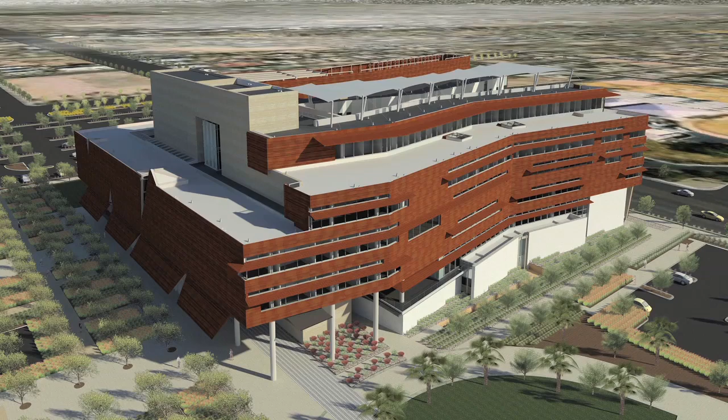This presentation documents the design, construction, and occupancy of the Health Sciences Education Building. We will utilize a case study format to better understand this exciting and complex project.

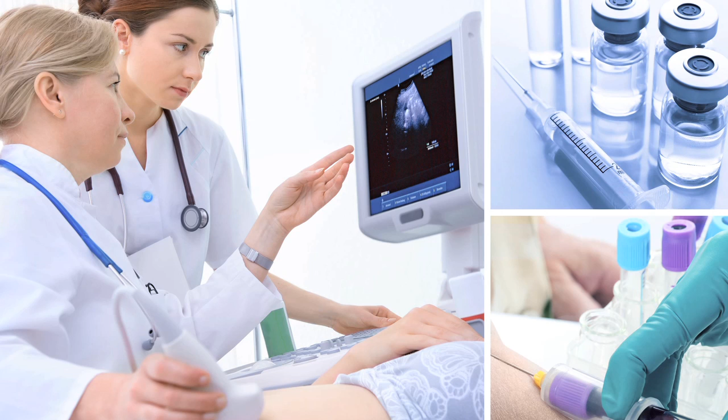The University of Arizona College of Medicine Phoenix has partnered with Northern Arizona University to create an innovative model for an interdisciplinary approach to health sciences education and research. The two universities, each with distinct institutional cultures, will collaborate on one campus, the Phoenix Biomedical Campus in downtown Phoenix at Copper Square. The city-owned Biomedical Campus is a 28-acre urban medical and bioscience campus planned for more than 6 million square feet of biomedical-related research, academic, and clinical facilities. The campus aims to have the highest concentration of research scientists and complementary research professionals in the region.

Phoenix is the capital of Arizona and the state's largest city, with 1.4 million people and a total metropolitan population of just over 4.3 million. With a huge land area of 517 square miles, the city has a low density rate of about 2,797 people per square mile. As a point of comparison, Philadelphia has a similar population at 1.5 million, but a density rate of over 11,000 people per square mile.

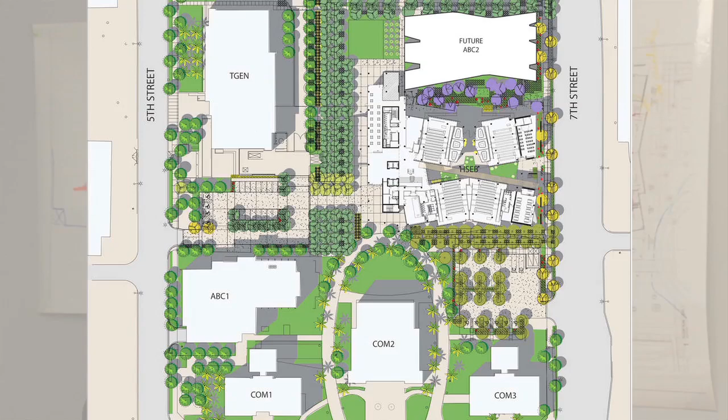The City of Phoenix owns the land of the Phoenix Biomedical Campus. We have been assembling property over a number of years, created a genomics research facility, built TGen's genomics research institute, which brought the interest of the U of A to Phoenix and to site the medical school, along with some historic buildings that are part of this campus. This is the next extension of the development of the Phoenix Biomedical Campus and the extension of the medical school.

Historically, campuses really are great transitions between what we call the town-gown relationship. It really helped to pull that together here. The scale is lower, a nice transition between those two. The idea of having an element in that location where there's always going to be activity going on is another great thing.

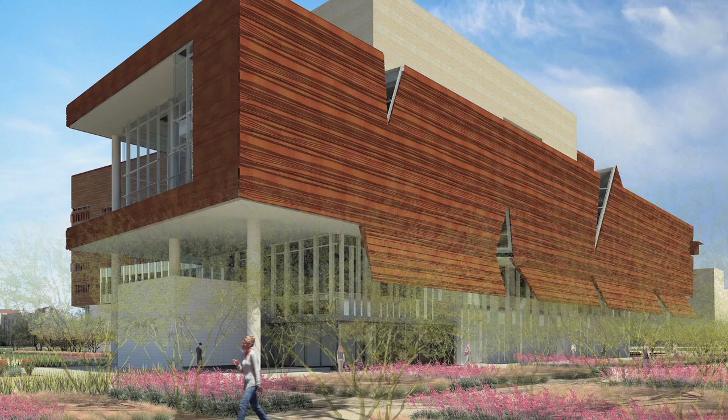So it really starts to blend those two things together. By having a campus, you can really control the flow within the campus and through the campus, so we're able to maintain the grid of the city through there without really disrupting that. And so what it does is it creates the element of surprise. You know, suddenly you're on a campus and you weren't really expecting that, but hey, this is kind of cool, and then you move through and you're downtown.

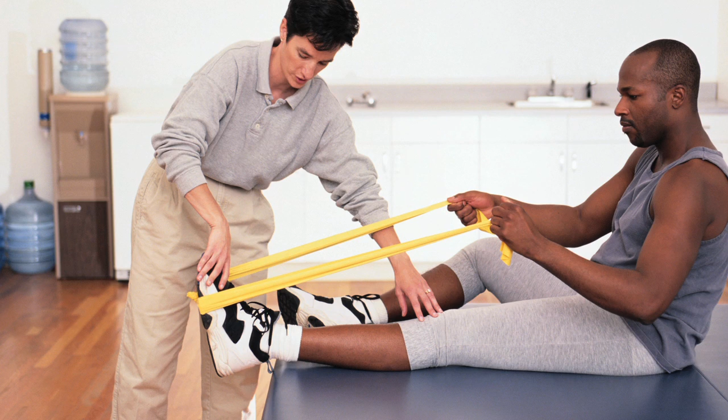The new copper-clad Health Sciences Education Building, or HSEB, will support the colleges of medicine, pharmacy, nursing, public health, and biomedical informatics for the University of Arizona. Northern Arizona University will offer its new physician's assistant and occupational therapy programs, as well as an expansion of its existing doctoral program in physical therapy at the new building.

When completed, the 268,000 square foot, six-story facility will provide learning environments to train 1,200 medical professionals. One of the major goals of this building was to build and construct a building that could be used in what we refer to as interprofessional training, that is, all the different health disciplines being able to interact while they're being educated within one space.

So in this new building, we're going to be seeing medical students, but you're also going to be seeing physician assistant students, physical therapy students, eventually pharmacy students, public health students, maybe nursing students, that will all interact in the educational setting, which really will prepare them for the real world.

Right now, most of those health professions are taught separately. We know that everyone works together when you get out into the real world. The doctor is alongside a nurse, which has to prescribe something that a pharmacist is going to fill. But those disciplines are not taught together. This building allows for interprofessional training right from the beginning so they know how to work with each other when they get out. This is a great place for them to start.

They're going to spend their first day in the profession in this building. Their first day of school, their first day of lab work, their first day of study in the library is going to be in this building. Someday they're all going to take care of us. We'd like to think that we're giving them a great start in a great facility.

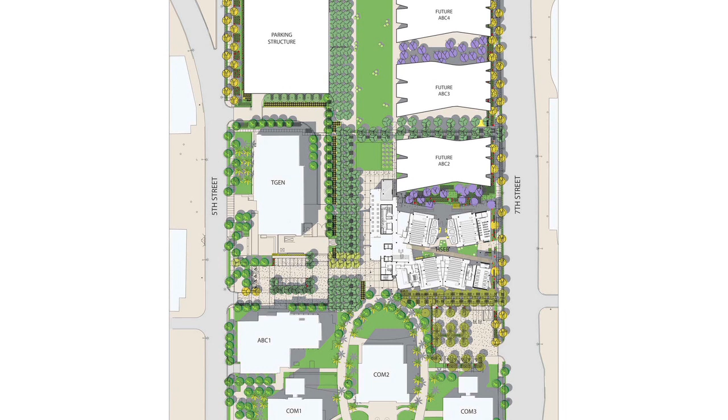The city's strategic vision for the downtown area where the HSEB is sited includes goals of density, community, and mixed-use development. The siting of the building originates from the master plan by Ayers Saint Gross, which establishes a north-south central campus green. The green connects the historic buildings, located to the south, with current and future research facilities to the north.

The site of the HSEB is on the southeast side of the campus, where a parking lot was once located. It is bordered by a busy street on the east side.

The City of Phoenix is on track with this in terms of how important density is in building up downtown. The city has introduced what's called the Downtown Code, and it's not for the entire City of Phoenix out to its limits. It's being defined for what we're calling the urban core downtown, from 7th Street over to 7th Avenue, and our campus is in the middle of it essentially. So the guidelines put forth in the Downtown Code apply to our projects.

In general, it's all about density and building to the property line and creating landscaping and doing all you can to create shade. Shade—if you haven't been here in July, you need shade when you're walking downtown. Trying to get more people outside and to use downtown year-round, and the way to do that is to create shade. You've got to get some shade on those sidewalks, whether it's from taller buildings closer to the property line to tree-lined streets. You have to do what you can to create some comfort out there.

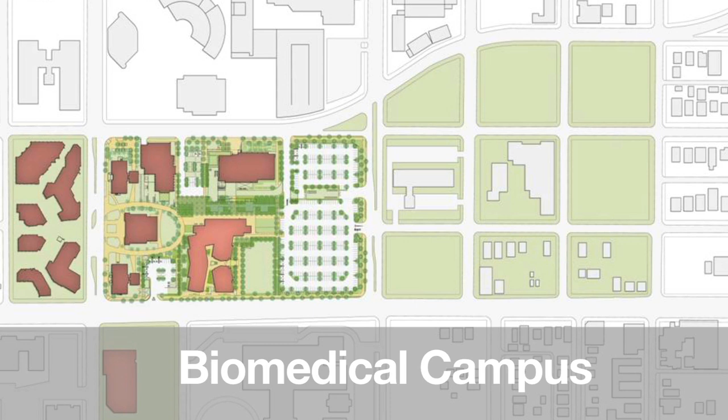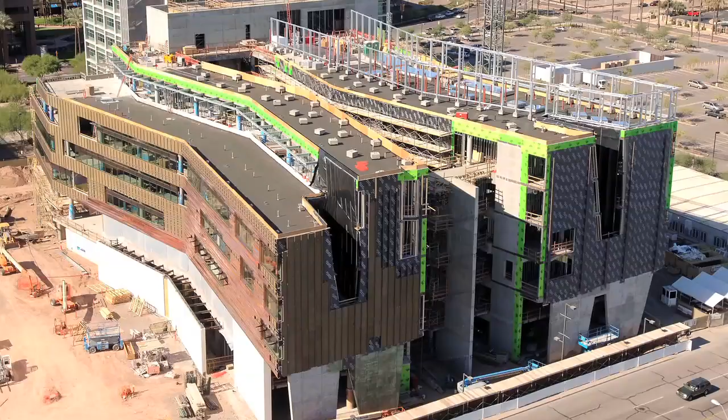We've assembled 30 acres of land to create this biomedical campus. This facility is sited in the center of that. So it was important for us that we maximize the resource of the land. The difficulty of assemblage and the price of assemblage really predicated that we needed to build up in the greatest density that we could, working through the programmatic constraints of moving students through a building.

Going into a high-rise condition is difficult—obviously higher priced construction, high-rise zoning, building code conditions, etc. So I think the project's really created a good balance with maximizing the finite resource of land availability with the density the project has achieved, and a good floor-to-area ratio, and likewise balance and symmetry to the campus. We've got the TGen facility, similar in height, stepping down to adjacency to the historic buildings as well. So I think the projects have created a good balance on the campus in those aspects.

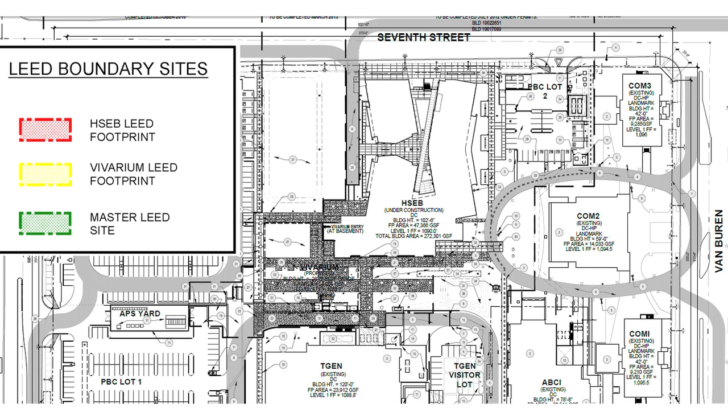The HSEB will take advantage of the campus and multiple building certification program for LEED certification. This LEED program helps project teams more easily and efficiently certify multiple projects located on one site and under the control of a single entity. The program's goals are to encourage a holistic, sustainable approach to project management, address the unique challenges and opportunities inherent in campus projects, allow project teams to document a credit once for the entire campus, and capture economies of scale in the certification process through shared credits.

The majority of the credits in the Sustainable Sites credit category will be achieved using the campus approach. In addition, water-efficient landscaping, refrigerant management, green power, environmental tobacco smoke control, and a green cleaning program are all implemented on a campus-wide approach.

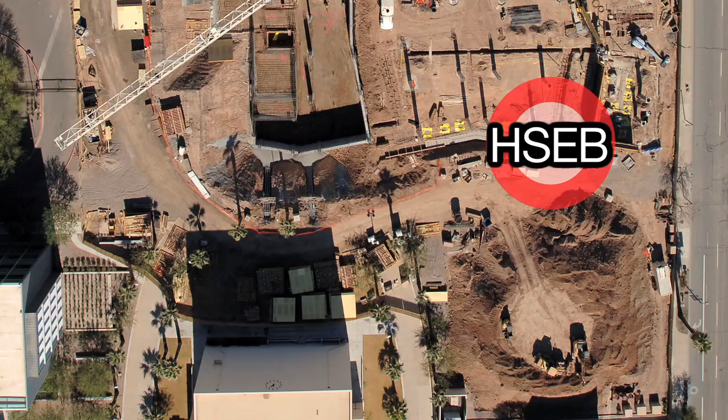The site previously was a parking lot and not making the best use of the land in downtown Phoenix. We, along with the design team, decided to use this particular portion of that parking lot for this building because it related most to existing buildings on the site. It's very important to make decisions for urban infill as opposed to a greenfield build, especially for a building that's so integrated with health sciences and education. Educating people about this site choice is very important.

Energy and atmosphere: reducing energy use in an extreme environment is a priority.

The team uses the integrated design approach and early energy modeling to optimize the performance of the building.

The desert is relentless and harsh, yet hundreds of generations have subsisted here, adapting to the ecosystem through respectful, practical, and sustainable practices.

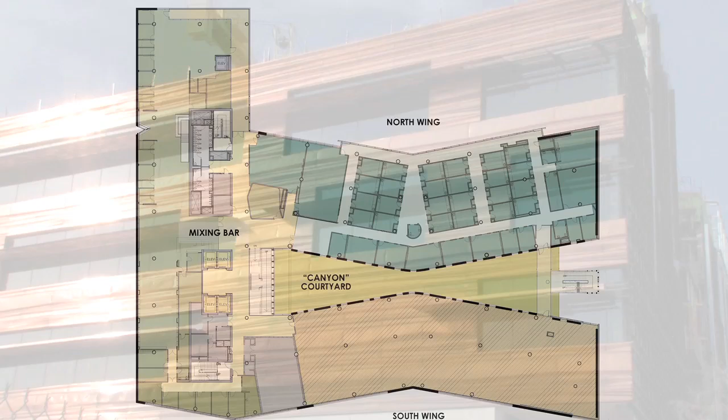The design for the Health Science Education Building was shaped by the desert climate and the goal of reduced energy consumption. The facility is organized into east-west wings connected to a north-south axis, establishing the eastern boundary of the campus.

The building's form and its orientation result from efforts to minimize the intense effects of the Arizona sun. The overriding idea behind this building was that it could only be built here and nowhere else, and it should look like that. That derives from its relationship to the place, what's important around it, but also its geographic nature.

This is fundamentally a desert landscape, and the sun is incredibly intense, so the design of the building is really formed by that. If you look at the building, it is elongated in the east-west orientation.

The idea being that you get predominantly north and south elevations, because those are the easiest to treat here. The north has just a little bit of sun coming around, and on the south the sun is fairly high, so with sunshades you can design the building fairly easily to protect that.

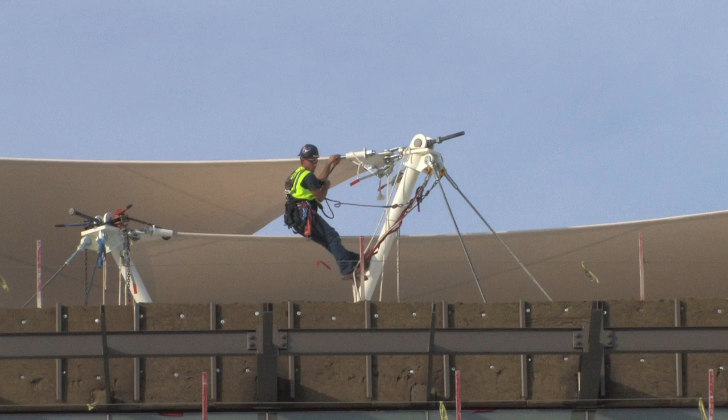But the east and west are much more problematic because the sun is really low, so we try to eliminate, for the most part, east and west windows. You'll see there are these kind of incisions into the building where we needed light.

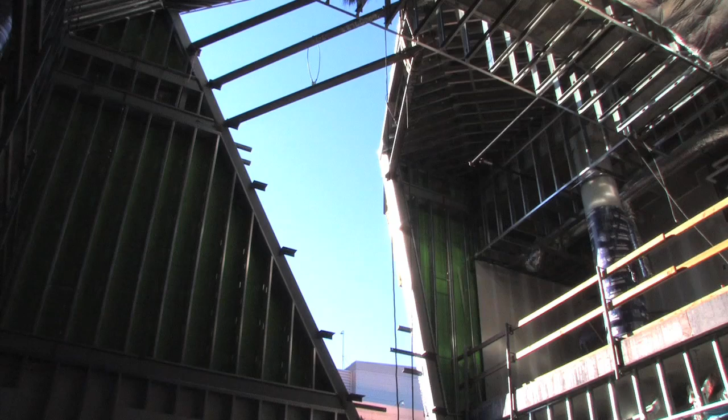You can see that in the Learning Resource Studio, the library up on the 3rd and 4th floor, where you have these big insertions so that even though we need light from the west, we get it from the north and south.

And also on the east, we have these big insertions. We have these big walls that are all copper, but we have cuts in the building that give light into the building where you need it. And then we have that big canyon.

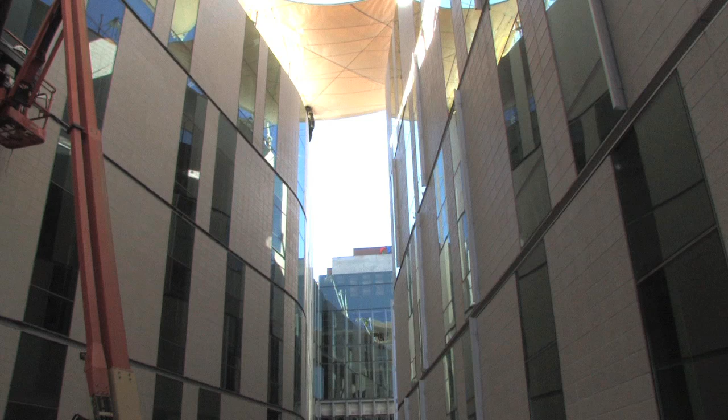The description I gave of how the building evolved affects how the building sits on the site. It's more a passive approach to doing the right thing in terms of energy consumption.

LEED has scores in terms of energy consumption, so from the outset that was one of the biggest factors for us in terms of LEED: trying to minimize the amount of energy that the building consumes.

Early in the design phase, the team turns to energy modeling in order to optimize the performance of the facade. The first step in developing an accurate and informative energy model is to establish the best climate data for the location.

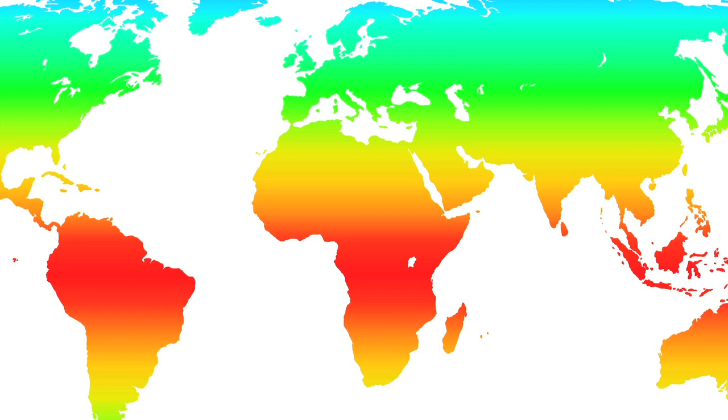The relevant data evaluated includes: 1. The monthly mean temperatures, which peak at a high of 115 degrees Fahrenheit. 2. The annual hourly temperature and humidity. Phoenix is typically a hot, dry climate, but there is an official monsoon season in which humidity reaches 60% RH with an outdoor temperature of 100 degrees Fahrenheit. This condition proved to be the worst-case design condition.

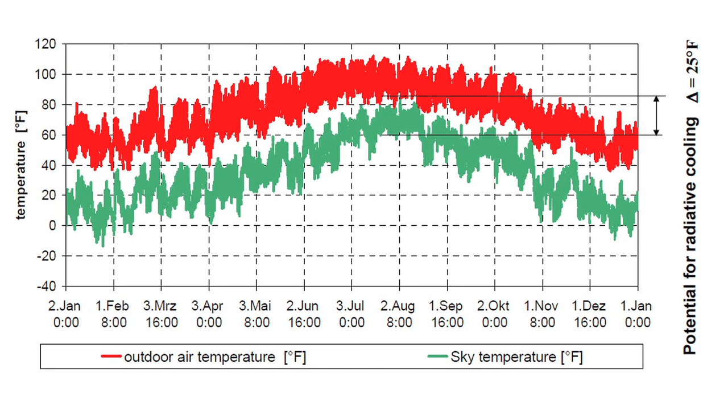3. Sky temperature. The sky temperature is consistently 25 degrees less than the outdoor air temperature. Although this provides an opportunity to reject heat to the night sky, high evening air temperatures will reduce the effectiveness of thermal mass as a method of cooling, which relies on a long period of nighttime cooling. This condition makes metal cladding an attractive alternative due to its ability to quickly reject heat when not exposed to solar radiation.

4. Solar energy. Phoenix reports a substantial amount of global insolation, a source of load on the exterior envelope that will require significant control. 5. Solar shading. Studies of the monthly solar irradiation for shaded and unshaded vertical surfaces demonstrate that 70% of the solar energy is direct beam that can be controlled by shading.

Providing a shading device with a 45-degree cutoff angle will reduce annual irradiation on a south-facing surface by two-thirds, east and west-facing by 50%, and even north-facing surfaces by 30%.

Based on the climate data analysis, two main objectives were set. 1. Prevent introduction of direct sun into openings on all elevations from May through the end of September. 2. Base the envelope performance on two worst-case conditions: highest summer temperature of 115 degrees, and monsoon conditions of 30% relative humidity at 75 degrees wet bulb and 100 degrees dry bulb.

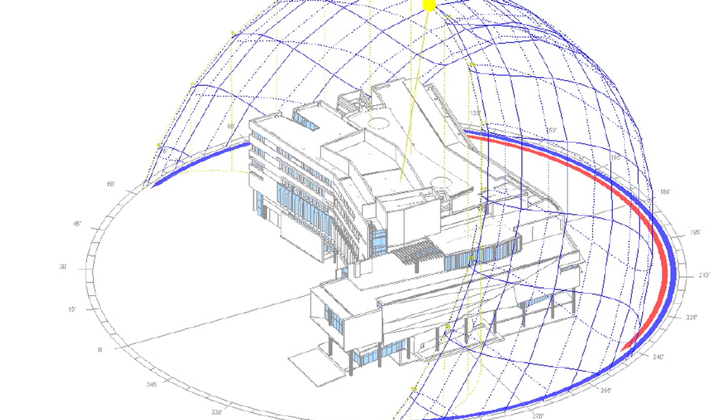Since optimizing orientation provides the greatest opportunity to control loads from solar gain, the next step was to test various options for the form and orientation of the building. A series of geometric shading studies helped the design team understand which portions of the building will receive direct sunlight during the design period and what types of shading devices are most effective.

The simulation package Radiance was used to estimate daylight with detailed 3-dimensional models, including relevant surface attributes such as reflectance and light transmission. These models also showed the effect of self-shading from the building itself and from surrounding buildings. The program Ecotect was used to show sun penetration at 3 important times of the design period.

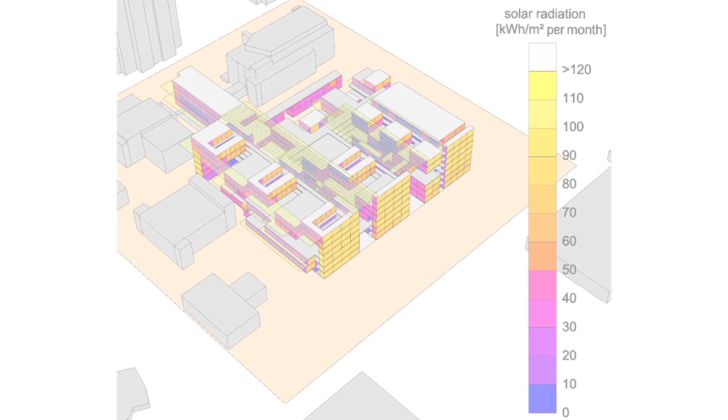The geometric shading study led to 4 main design recommendations. First, orient the wings in an east-west direction to most effectively control solar gain on the building's facades.

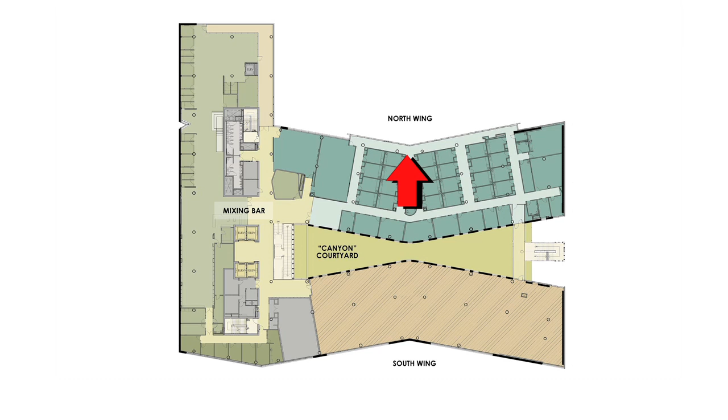Second, use self-shading to control solar gain by shaping the facade in 3 directions. This would entail curving the floor plates along the east-west axis, reducing the amount of sun on the east half of the south facade in the morning and the west half of the south facade in the afternoon, and sloping the vertical facade so that the upper floors projected beyond the lower floors.

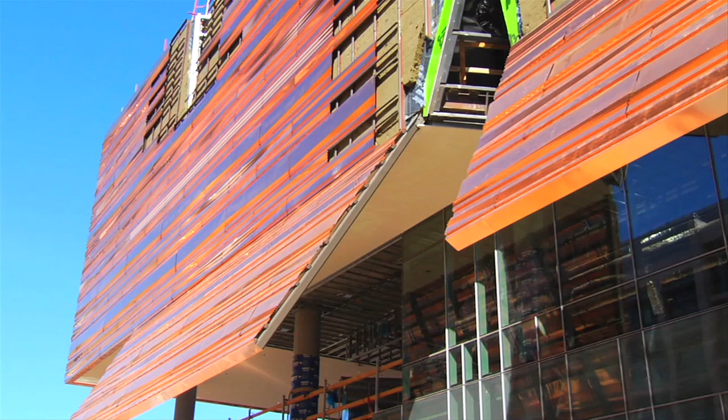Third, provide shading devices on all elevations to prevent direct sun from entering openings from May through the end of September. South facades could be nearly completely shaded with horizontal devices of various geometries. East and west facades should be as opaque as possible, but if exposed, protected from low and high angle sun by honeycomb or screened structures. North facades receive low-angle summer sun and should be protected by closely spaced, shallow vertical fins.

Fourth, the courtyard would require protection from overhead. The design team adapted the design to these principles. Rather than a smooth curve, the north and south wings were bent into a bow tie shape, which achieves roughly the same performance while allowing rectilinear layouts of programmed spaces.

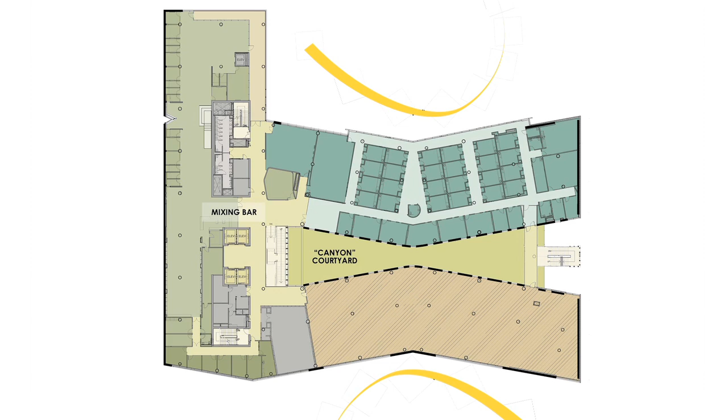Programmatic constraints would not allow the sloping of the vertical wall face, so the sunshade design parameters were modified to compensate. Next, the team needed to consider the program, daylighting, and views in order to implement the recommendations for shading and fenestration for each facade.

In order to rapidly test various options, TransSolar developed a simplified approach where an individual model is created for each of the 5 major space types identified in the building program: offices, classrooms, clinical spaces, gross anatomy laboratories, and circulation. Each space is modeled as an individual, typically sized room within the building, with 3 interior walls and 1 exterior wall with 60% glazed area.

Various combinations of ventilation systems, thermal comfort controls, fenestration, and shading devices were modeled. The thermal simulation of these shoebox models was performed using TRNSYS 16.

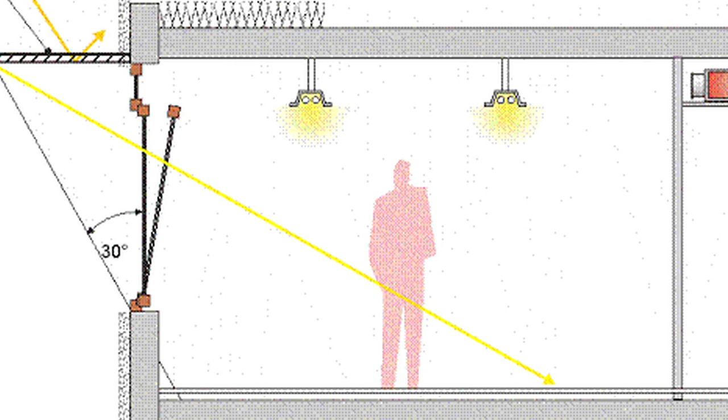The next study looked at the effect of daylighting on the design of the facade and composition of the elevations, with the important goal of projecting as much daylight deep into the floor plate as possible. While this at first appeared counterintuitive for Phoenix, it was justified by the reduction of electrical lighting loads and maximizing connections to the outdoors for building occupants.

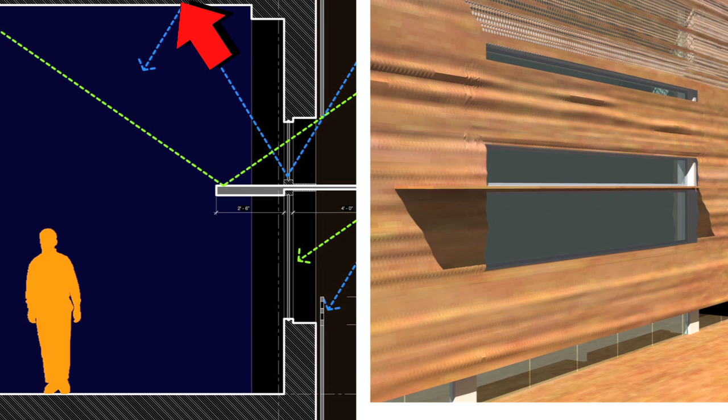The team configured shading devices to prevent direct sun from falling on glass from May to September. By using the shading devices as light shelves to reflect indirect light into the building, they also reduced glare. The program Ecotect was used to show sun penetration and generate sun angle studies to help configure the devices.

Finally, an exterior wall section profile was developed for each of the major space types, configured for orientation, ceiling height, room depth, and room activity. These optimized profiles were then applied to the elevations.

Envelope performance of the building is huge. It's key, from my aspect as an energy modeler—whenever there's a high-performing envelope, I get my hopes up for high energy savings, because it's where you can make or break a project. It can either use a lot of energy, or it can retain a lot of cooling and kick out a lot of heat. This project was great.

AEI and the design team worked with a company, TransSolar, to do a solar study of the building. What TransSolar's report told us was that they were able to place glazing on the building so that in the summer there would be no direct solar radiation, no direct solar gain on glazing. And in the winter, the building was positioned such that the sun would actually heat the glass and provide a little bit of a heat load.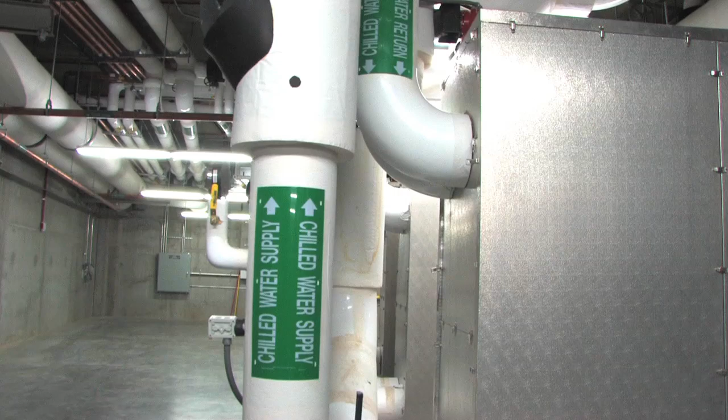It actually turned out that it doesn't hurt us and it helps us in heating or cooling season. From an energy standpoint, that means we now use less chilled water, which on this project is purchased through a utility. So it means less of a utility bill, not necessarily electricity. On the heating side, we actually use less natural gas.

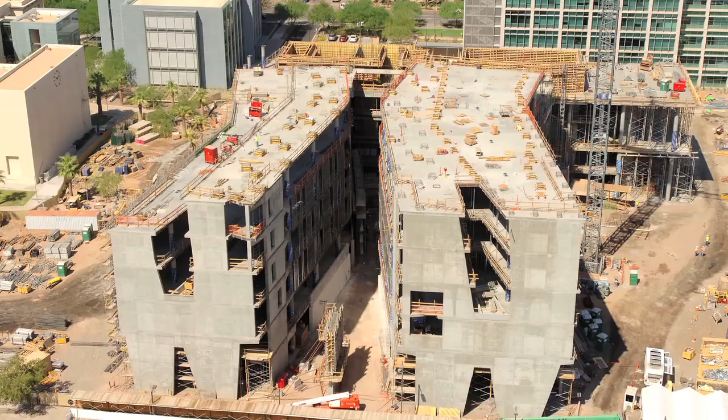So it was really big for something as simple as a window to equate to cost savings for chilled water and natural gas. We used TRNSYS, Therm, and Ecotect, and the challenge on this project was finding the right modeling software at the right stage of design. We used Ecotect at the very beginning to optimize the shape of the building and its orientation to the sun.

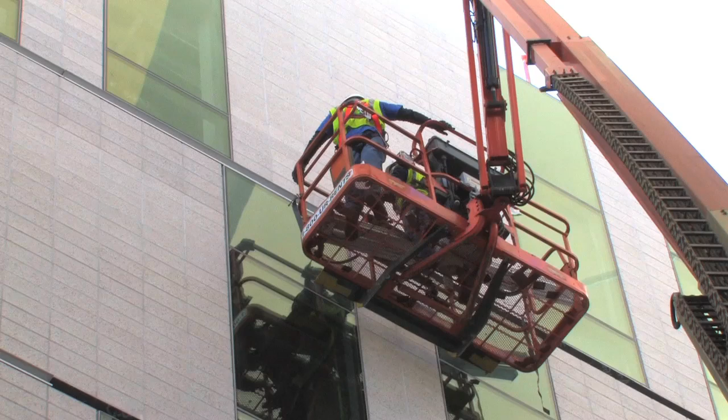We also used it in the design of the sunshades. One of the main criteria we established was that the windows would always be shaded from May through September, that the glass would be 100% shaded. Modeling software was essential to model sun path diagrams, to validate to the owner and the mechanical engineer that the sunshades were designed so the glass would be shaded those critical months out of the year, so he could validate his energy model.

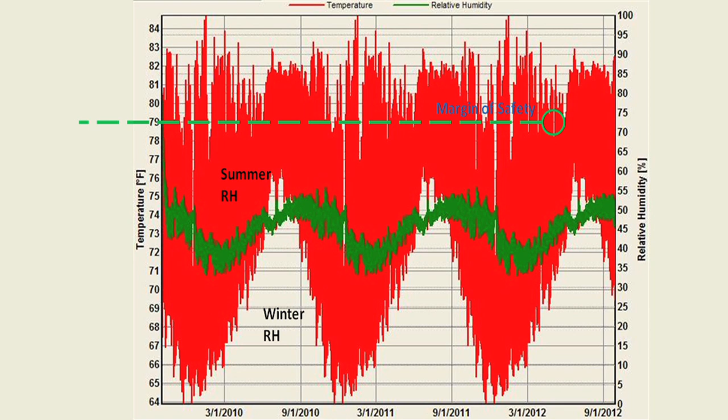We used a WUFI model, a program from Germany that is basically a hygrothermal analysis software, which we used on the exterior wall. It's often used in colder climates to figure out where the dew point is. In Arizona that wasn't as critical, but we were able to use it when designing the exterior wall to determine the best location, type, and thickness, and optimize the insulation placement relative to the membrane.

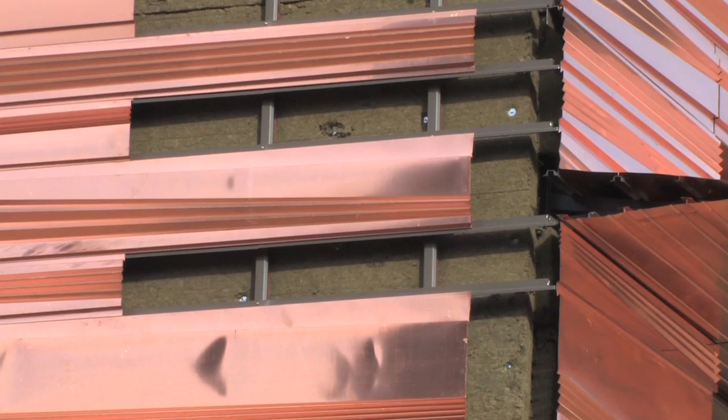That's the software we used to determine that the insulation was best placed in front of the waterproofing membrane, to keep it at a constant low temperature, and to optimize the type and optimum thickness. We thickened it up from what was normally required for the energy code, in order to make sure it performed well enough so the waterproof membrane would not get overheated and would have a long life.

The design for the Health Sciences Education Building, HSEB, draws inspiration from Arizona's mountains and canyons and responds to the desert climate, characterized by intense sunlight and extreme temperatures. For insight, the architects turned to early human settlement, where Native Americans traditionally sought shelter deep within slot canyons naturally created by wind and water erosion. These self-shaded, majestic spaces maintain temperatures 15 to 25 degrees cooler than the ambient temperature outside.

Honestly, my favorite feature is the canyon in the project. I think it captures a range of design issues, all the way from master planning down to how it's detailed — the scale of it, the intent, the inspiration. From CO's point of view, it was the striations of rock in a canyon, so they've played that out in their material use going up and down the canyon, up the sidewalls of the canyon.

Part of our master plan was to allow filtering of people, movement laterally across the campus. By putting a big blocky building there, you would be walking around it. Our building, HSEB, is very porous at the ground level — you can move in all sorts of directions. It makes good connectivity east-west, as well as starting the path north for future buildings. It sets up a nice rhythm of solid and void, occupied space and flexible space.

A couple of innovation credits we were going after — when you go out and look at the courtyard, there are about one or two innovation credits there, which have to do with the fabric structure that covers the courtyard and the air conditioning of the courtyard, which sounds odd, especially in Arizona.

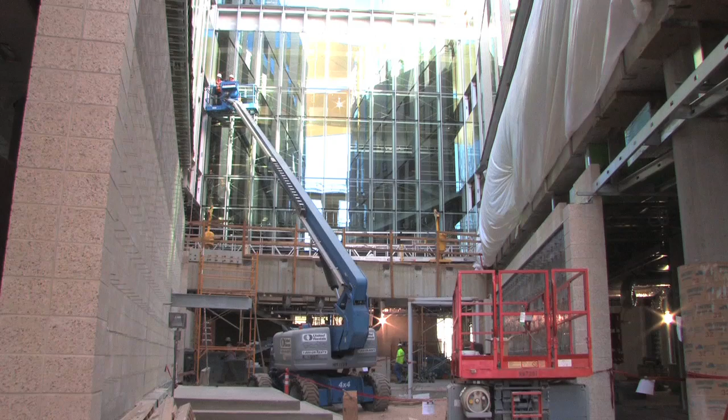We really did a series of energy models and energy studies that showed that by layering on different technologies onto this central public outdoor space, we could actually take an outdoor space in an environment as harsh as Phoenix and really make it a pleasant place to be in year-round.

The way we did that in LEED terms was through the solar canopy, the tensile fabric structure that covers the courtyard. Because what that does is simply block the sun from entering the courtyard year-round, which is the first and most important way to optimize the thermal comfort of the outdoor space.

The second thing that we did was the geometry of that courtyard. It's a very tall and narrow space, basically designed around the idea of the local canyons that you have here, which in the Arizona desert are the places where the Native Americans basically built their houses, because they were always the coolest spot in the desert, very tall and always shaded. So we took that idea and translated it into the courtyard.

So basically by modifying the geometry of the court, having a tall, narrow space that was covered against the sun, those were the first two things that we did to optimize the comfort.

The next thing was we air conditioned the courtyard, which essentially means the air conditioning system has a certain amount of waste air that's basically rejected out into the atmosphere. A certain amount of air gets recirculated back into the building, but a certain amount that's unusable is usually just rejected into the sky.

What we did is we took that air and, at certain times of the year, brought it back into the courtyard. Even though the air coming out of the offices or classrooms is maybe 80 to 85 degrees, when it's 105 outside in that courtyard, even though you don't have the direct sun, pumping 80-degree air into an area that typically is 100 degrees reduces the temperature of that outdoor space. That was another one of the innovation credits that go into the whole system.

It's really a whole system of four different technologies in that courtyard: the shades, the envelope or the shape, the air conditioning, and then the thermal mass, the concrete block which defines the courtyard, and the materials. So it's really four things that don't each add up to an individual credit, but they're four things we still felt were important to do anyway, even though maybe only one or two of them will really result in a LEED credit.

One of the things that was very important for us was to do this connecting bar that goes in the north-south direction. So we have the library there, and that's where all the students will congregate and will eventually connect to the new buildings that will be going to the north of the building.

How that works is really quite terrific. The canyon, I think, will become a great space where students will be able to hang out. In this climate, we thought that we could have a really tight space, high and tight, so that the sun wouldn't get into it. We modeled it, and that's why we're now putting on these kind of sails up at the top, to keep the sun away indirectly.

Also the material is different on the inside there. It's a masonry, a concrete block, which has better thermal properties in terms of mitigating the diurnal range—it traps the heat, stores it, and releases it much more slowly than a cavity wall. So the idea was we have these masonry walls in that canyon, and on the outside we'd have this copper.

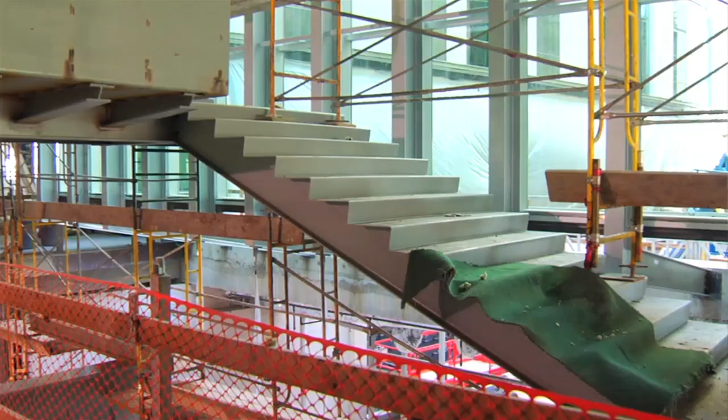Through various starting and stopping and design phasing, there was some early energy modeling, but the real push to get a solid model going was towards the end of DD. The mechanical engineer would come up and say, hey, we had this meeting and we threw out an idea, and where would this put us? How would this affect the model? It might have been something as simple as one glass type compared to another, or the shade compared to another one.

What actually happened was to take that on the other side, during submittals the contractor is proposing this. They're saying the cost savings is there, what does it do to our energy savings? So it was kept in mind that if we can get the same performance for less price, let's entertain that notion. But it always came across my desk: what does this glass do, or what does this do to our energy savings? So that was using energy modeling, not necessarily to inform design, but almost as a VE tool.

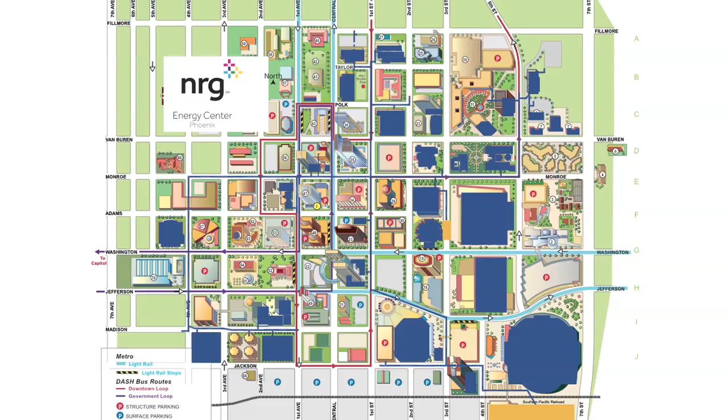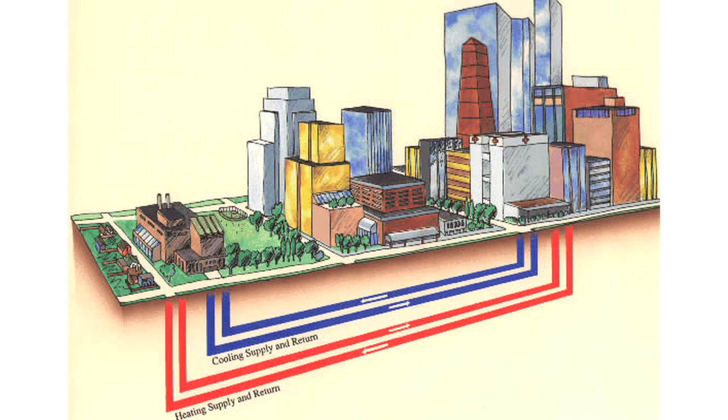The chilled water on this project is actually purchased through a central utility. In Phoenix, there is a central utility downtown that has infrastructure to most of the buildings downtown. So it was very easy for us to tap this building into an existing chilled water line, and they meter it just like a water meter from your utility at home. What that does is measure flow and the delta of the temperature difference in the pipe. So they actually bill based on how much energy you pull from the chilled water, not necessarily flow.

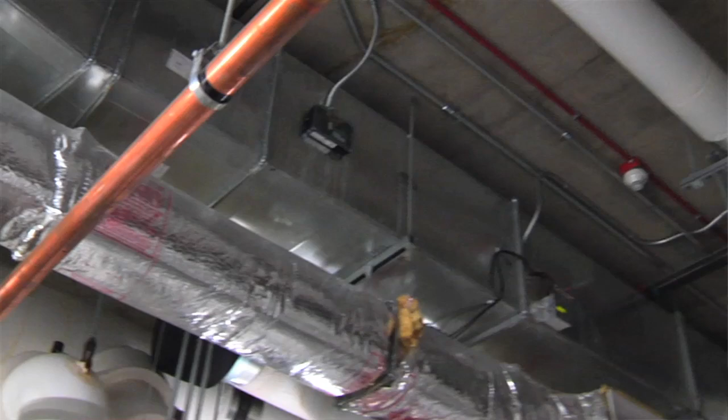So it was easy for a building connection, but it was challenging for energy savings because, just how it's modeled, the building is no longer a standalone system. It now relies on a utility plant that is a few miles away.

The refrigerant management prerequisite was met because the utility takes very good care of their equipment, and they make sure they have low ozone depleting potential and low greenhouse gas refrigerants. But because we modeled a district chilled water system, we now needed to take into account the downstream and upstream equipment for enhanced refrigerant management. Because there was a chiller, there was refrigerant, and we actually didn't qualify for it.

The difference between energy cost reduction and energy savings reduction is one that I struggle with as an energy modeler. Mostly because if you have a system that is very efficient and reduces energy, but it uses, on this project for example, the cost to connect to chilled water is at a premium, and the chilled water actually costs more than the electricity when you break it out unit for unit. What that means is that while we use a more thermally efficient system in chilled water, it's better for energy transfer, we're actually being penalized from a cost perspective because we've reduced energy, but we haven't reduced cost to its maximum.

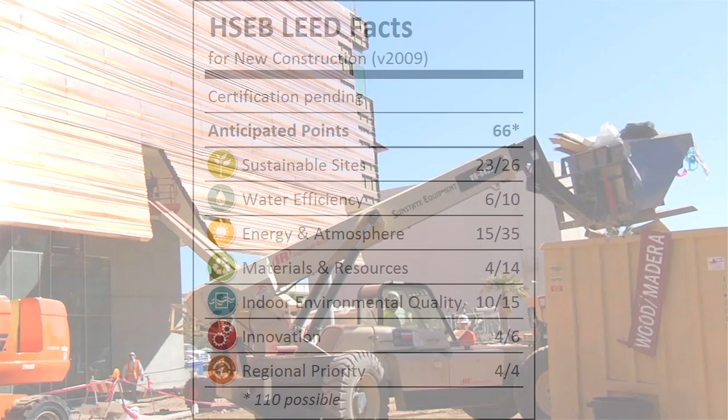Materials and resources: priority is given to materials that are durable and high in recycled and regional content. The team also sets high goals to divert construction waste from the landfill and source sustainably harvested wood.

The topography of Phoenix is flat, but the city is surrounded by mountain ranges. The material choice for the external skin that wraps most of the building derives from the regional connection of Arizona's abundance of copper ore, its durability, and an innovative adaptation of skin technologies and manufacturing capabilities. Conceptually, the skin is a permanent sunscreen, an SPF that never wears off. Taking its cue from the functional form of local vegetation, the copper sheets are manipulated akin to the flutes of a saguaro cactus to absorb less direct solar radiation. The copper panel's form and color correspond to the nearby geological formations in the mountains.

We considered several different skins, and they came down to zinc and copper.

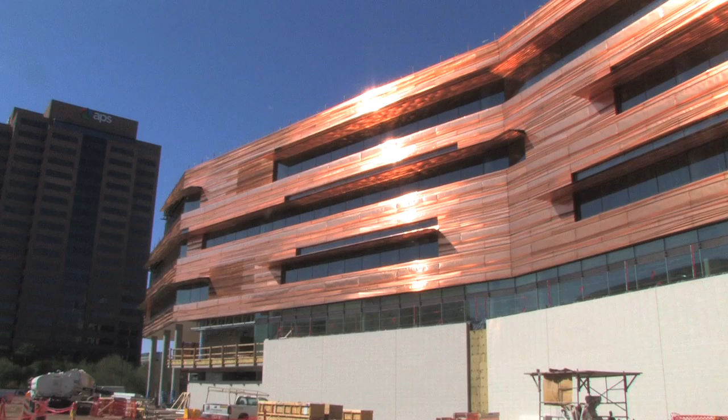Copper is one of the 5 C's in this state, so we felt it would best represent the architect's vision. He presented what he thought the building should reflect. It's a building for Arizona, not just Phoenix or the University of Arizona. This is a building because kids from all over the state are going to be going to med school here. That's the vision he wanted, and when he presented this, there was excitement from day one. This is one of those that just reached out and grabbed people from the very beginning.

Fortunately, we hit the low point in copper. It was under $2 a pound when this was being considered, and both the architect and the contractor came forth with a plan that said we should just pre-purchase all the copper for this project, right now, today. We took it back down to the university level and talked about it, and said yeah, this is a great idea, we can do this. And what a building it's going to be. So that's kind of how the idea evolved into the reality you see out there right now.

The other thing that's regional about this building is that copper is a regional material. It happened to be at its low point in terms of cost, so we could afford it, and it was a local material. But we tried to get a building that connected with the surrounding mountains. If you look, a lot of the views around here are of the mountains that surround Phoenix, and we wanted the color and the striations to relate to those mountains. So we did a lot of design investigations at the outset, and originally we were looking at rusted steel, but that had its own problems. We wanted that kind of color.

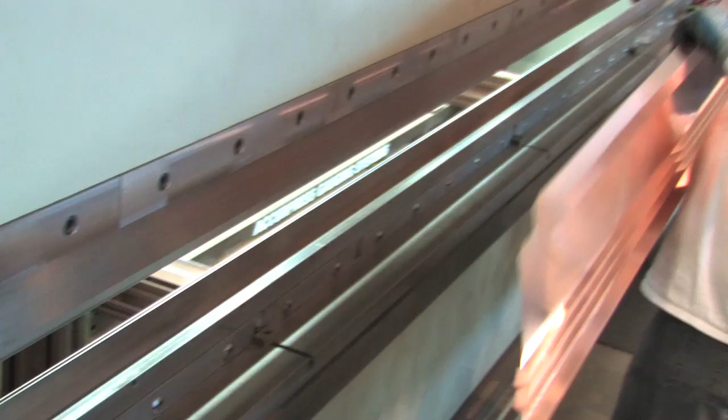We realized we could get that with copper because in this climate, it's not going to turn green, it's going to stay brown. With these folds, we designed about 26 different panels in different combinations, working with the subcontractor, Kovach, to determine what was possible and feasible to make. We arranged these panels in different ways so you get striations in the building that look like the striations in the canyons you see around here, the kind of stone striations. That's basically the idea behind what the building looks like in copper. As time goes on and the copper starts changing color and gets more variegated, it will really feel a bigger connection to the surrounding mountains, and hopefully it'll become much more apparent what we were trying to do.

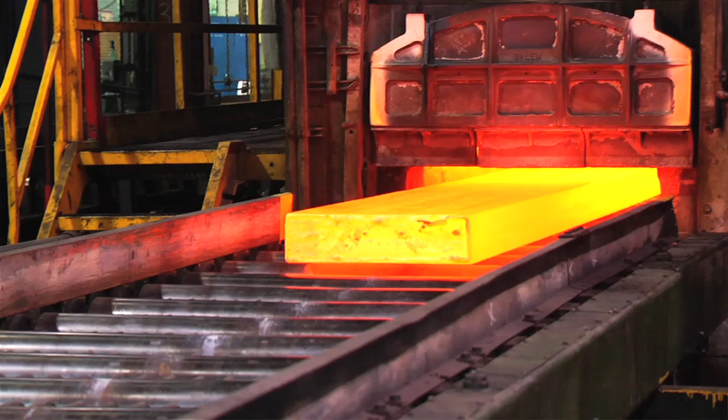The vision that Kovach had for the HSEB project was to come up with something that had never been done before, that could never be replicated again, and to accomplish the design intent and really bring that design to reality. So where did the copper come from in the first place? The copper on the HSEB project is 99% recycled material from U.S. copper mills. Very likely that copper was parts and pieces of computers, plumbing fixtures, wires, etc., that saw a life cycle for the last 30 years before it was recycled into copper that was shipped to Arizona and manufactured into the panels on the outside of the HSEB building.

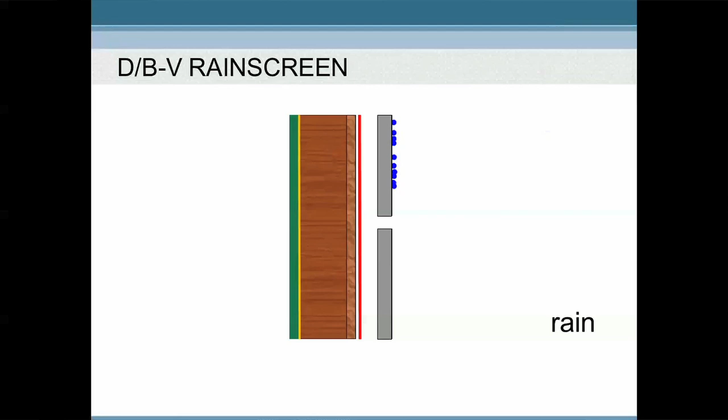Once we knew we were using a copper cladding system, we tried to come up with a technology or way of using it that we felt was really smart and suited to the local climate. So we basically adapted rain screen technology and used it as a sunscreen. We took a system that's traditionally used in the Northwest or in Europe, which is really about keeping the water out, but we actually used it as a way to keep the sun out of the building. So in this case, the copper is really used as an exterior cladding material.

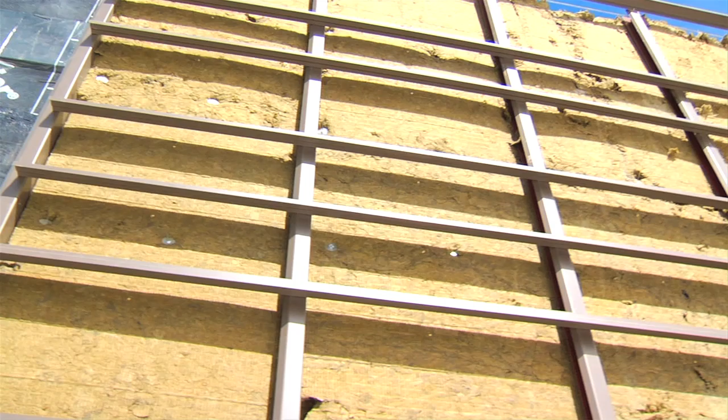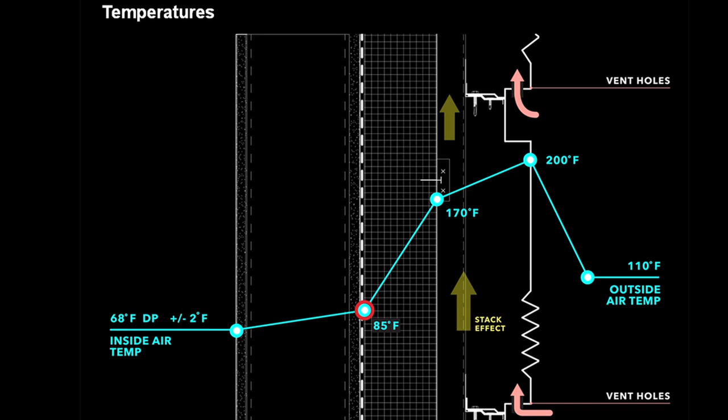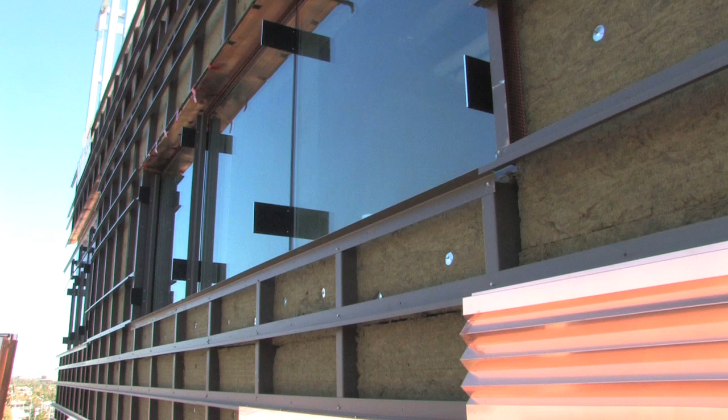We basically built this sandwich wall where we have the exterior structural wall, a waterproofing membrane, a layer of 4 inches of rigid insulation, a 2-inch airspace, and then the copper itself. By doing that, the copper and the airspace work together to absorb the radiant heat from the sun and allow it to travel up through that airspace and vent out the top of the building. The insulation then works to insulate the building, and because it's in front of the waterproofing, it protects the waterproofing from getting hot, which obviously in Arizona is very important.

We were able to do a series of thermal models that demonstrated that when it's 200 degrees on the copper surface itself from the sun hitting it, the waterproof membrane never gets above 80 or 90 degrees, and is able to operate within a temperature that makes it last a full 20 years.

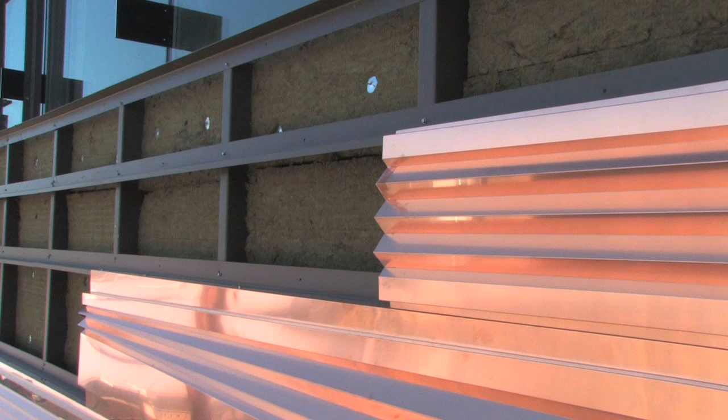Had we put the insulation behind the membrane, which is something typically done in Arizona, and the system we used to attach the copper back to the building tried to minimize thermal bridging. You've got a material like copper which gets very hot and absorbs heat, but we worked very hard to put thermal isolation or isolators between the copper and the support structure that holds it up, and to embed that support structure within the insulation.

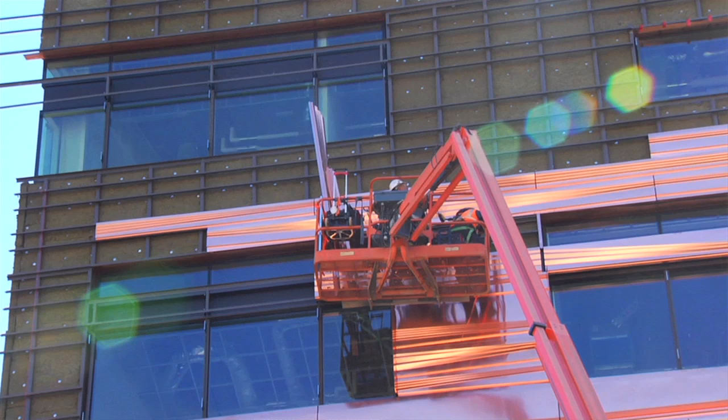So it's really not just the copper itself, but the copper, the supports, the insulation, and the whole assembly itself, using the air cavity that is normally part of a rain screen to also turn the rain screen into a sunscreen. The copper is really part of an entire integrated five-component assembly that drains the water out and drains hot air out, preventing the transfer of heat from the copper to the support structure in a number of different ways. So it's a fully integrated assembly and a fully integrated system that I think is really going to perform well.

Maximizing the integrated design process was essential to the success of the health science education building. It meant assembling a team of experts including the design team, construction manager, and exterior envelope contractors, who understood the project's goals and were prepared to contribute in their particular areas of expertise. The sustainability goals and resulting performance criteria were defined early, during schematic design, when the construction manager was brought into the project.

The value of LEED is that it really forces the owner, the architect, the entire design team, the city, and everybody to get together and focus on what is really important, and to set priorities for the project. Whether the building gets 50 points or 56 points, the value is that it gets everybody together and forces everyone to sit at the same table, speak the same language, and prioritize and decide together as a group what the priorities are for the project. That, I think, has tremendous value.

The integrated design process is vital when you're working on a project of this scope. The site is very sensitive, so working with a civil engineer to understand runoff and retention requirements, and working with the architect to understand anticipated traffic flow of patrons, students, and administrators, not only into the building but around the rest of the campus, was very important. Understanding what their goals and objectives were was important because that really informs what we do with the site design. It's all in response to what the program is for the building and what the mission is for the client, so we really need that information from the people we collaborate with.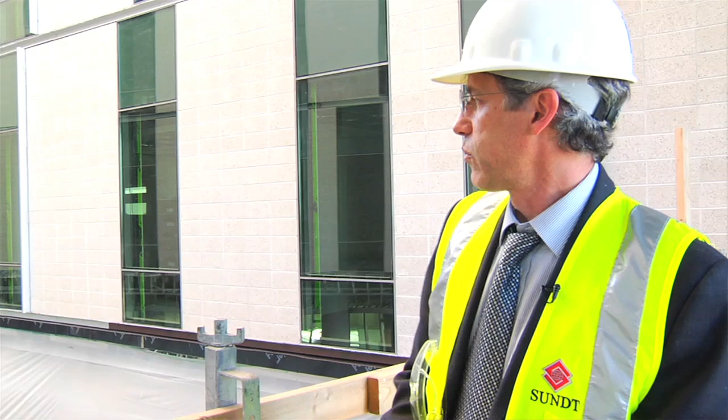The architects had a great vision, both in materials and in visualizing what the building would be, what the space would be, and what the site would be. So we really tried to implement that with our landscape design.

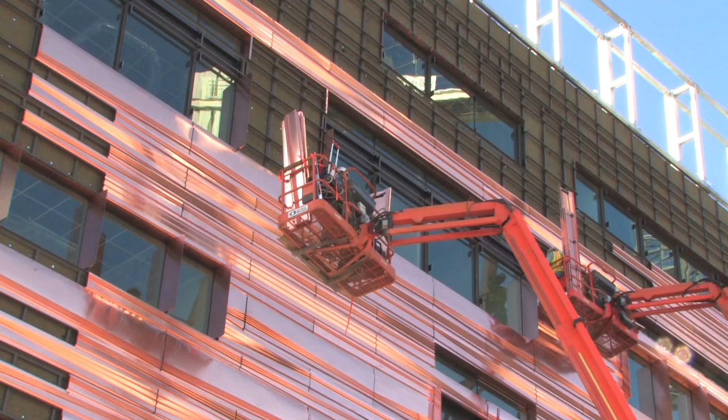The building would not have the same appearance, it would not have the same result, if we did not have the entire design team or the contracting team on board from the beginning. It was absolutely essential that we had the subcontractors, especially the metal panel and copper cladding contractor, and the curtain wall contractor, on board while we were in the design stage. Their ability to help us understand the relative costs of the different systems, weigh different options, look at different ways of building the building, optimize the performance of the building, and bring it in on budget could not have been done if we were designing the building in a vacuum. If we were just designing it in a traditional design-bid-build fashion, the building would never have looked the way it does today.

Another aspect of the integrated design team is the integration of the contractor with our team, and that's something we've been doing a lot recently. The industry in general, the profession, has gone that way, and it really has helped the building because even during the schematic design phase, the contractor is on board and gives us input in terms of the cost effectiveness of certain strategies.

And even down to this, they get subcontractors who work with us, and when we detail the skin, like the copper, or where the mechanical rooms, the systems parts, they had a big impact in terms of making it a cost-effective decision. So for instance, in the mechanical room, we have a distributed mechanical room on every floor, as opposed to having it on the roof.

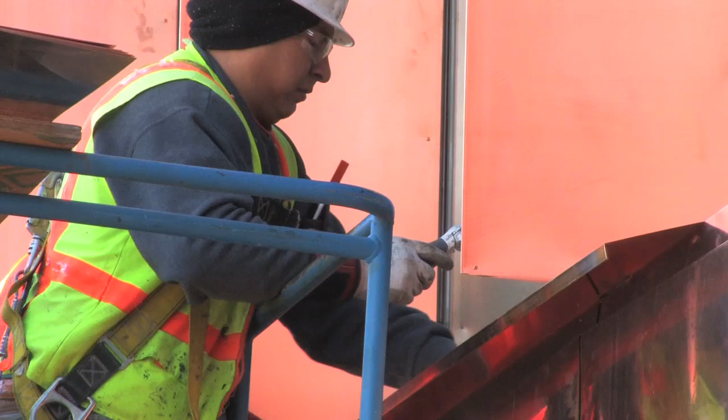That has a lot to do with the contractor being involved. And also, when you have a contractor that you have a good relationship with, like we had on this job, they become your advocate in terms of saying that they can afford to build what you're doing. They made the client feel at ease that they could get this building at the cost.

And they're doing this sort of, it's almost like a menu. As we're doing design, there are certain elements that we want, and they're costing it, and they sort of say, okay, you can get this, but you can't get that. And together we sort of say, well, this is important to us, let's do these things. And that's how the integrated process works, which is really pretty terrific.

It was a collaborative process, so either the architects would come over from California here to our office in the Valley, or we would fly over, the construction management team, to their office in California. This was done on a weekly basis just in order to share and collaborate. We also used our subcontractors as a collaborative design assist as well.

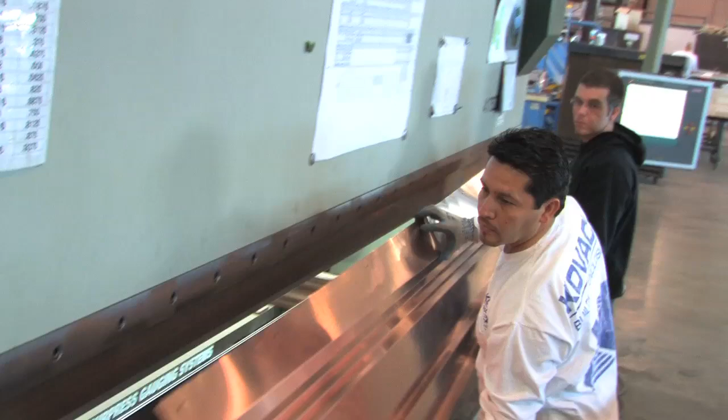It worked very well. We had some early subs that we brought on to do design assist, the mechanical and electrical subcontractors, as well as KT Fabrication, who is doing the glass and glazing, and Kovach is doing the metal panels, the copper panels themselves. Brought on early to do design assist.

And what it did is allowed the architects to use the expertise of the subcontractor during the design process, and tell them what would work and what wouldn't work. Real easy to draw a line on a piece of paper, not necessarily that easy to put it in place out in the field.

So a major hurdle for the team is the significant decrease in budget that occurs after design has begun. The project has gone through a lot of iterations. When it was initially awarded, it was in the neighborhood of $330 million, $480 million total project cost. That included 2 buildings. Our HSEB was supposed to be 440,000 square feet, and then there's a whole other research building called ABC2 that was part of the project. That eventually fell away as funding from the state was dwindling.

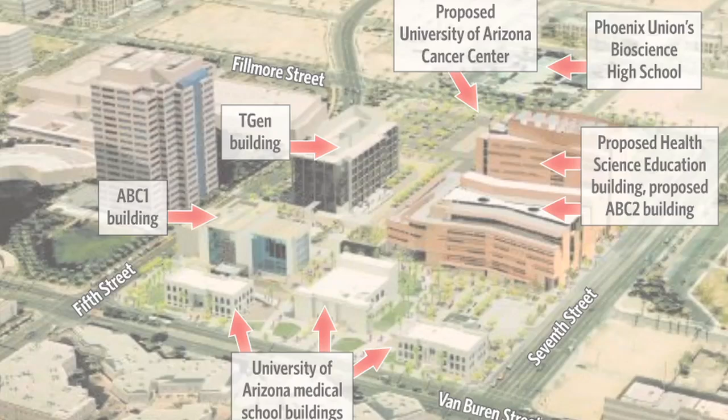In the period where we were getting from 440,000 square feet down to 260, the building took on many, many forms. There were versions of the footprint that stretched all the way across the property over to 5th Street, spanning the entire campus laterally, and that was really a part of the master plan too, to try to do that.

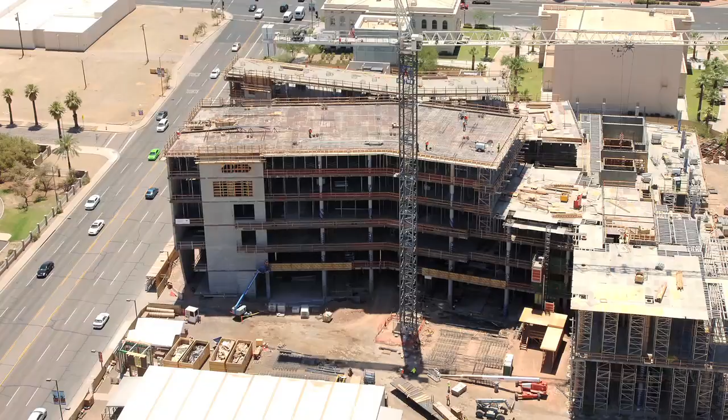By the time the square footage was reduced, the building was becoming too short and too low slung. It really wasn't accomplishing any of the goals the city may have had with regard to density and height on the campus. So we sort of packed it back together and made a larger, more sensible building, and preserved a site for future building on the other side of the campus. From a master planning standpoint, we were able to follow through on some of the tenets of the master plan.

So in conjunction with the contractor, the architect, and the subcontractors, who we have on board very early in the process for design assist, because cost is such an important component of designing a building, we go through the process as a team. We incorporated BIM, building modeling, very early, from day one. And that in itself lends all the team members to certainly pay attention to how the design is evolving, but also the cost of the building, because everyone has a stake in that.

Certainly study design alternatives. From day one, we set out this grandiose design, and then from day two, we incorporate design alternatives, value engineering, and go through that process. But everyone certainly pays attention to the process, and probably more importantly is invited to the process. We take great pains to make sure that there's involvement by all team members from the very beginning. Budgets are always challenging. This building started out with a certain budget, and then we had a couple of ripples that turned into tsunamis. Very, very challenging budget climate, but again, through the value engineering, we got through those.

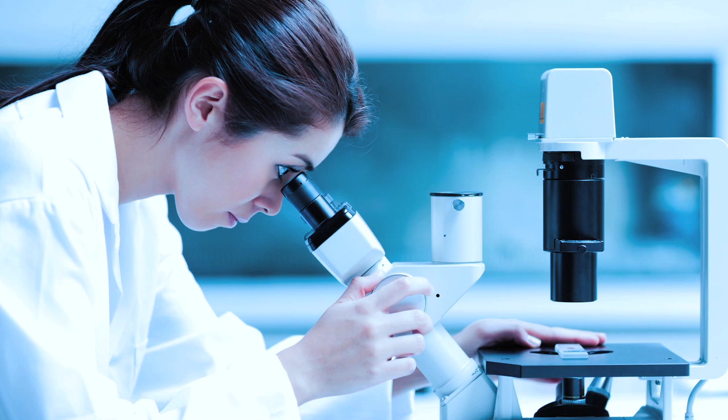We needed a facility that's going to be very welcoming to medical students. Welcoming is a word that encompasses the technical side of the building, but also the atmosphere in which they learn. Medical students typically spend an awful lot of time at the facility where they're learning. Whereas I said earlier, this is my home, their home's the library, the medical library, the lecture halls, the clinical studies. Pick the part of the building, they're going to be living there, except for gross anatomy, but they'll spend time there.

Regional priority. The team has given emphasis to implementing environmental strategies that are encouraged by the regional priority credits for the location of the building.

The HSEB project is attempting 11 of the 14 possible credits in the Sustainable Sites category. In the Water Efficiency category, the project is pursuing water-efficient landscaping at the 50% level and indoor water use reduction at the 35% level.

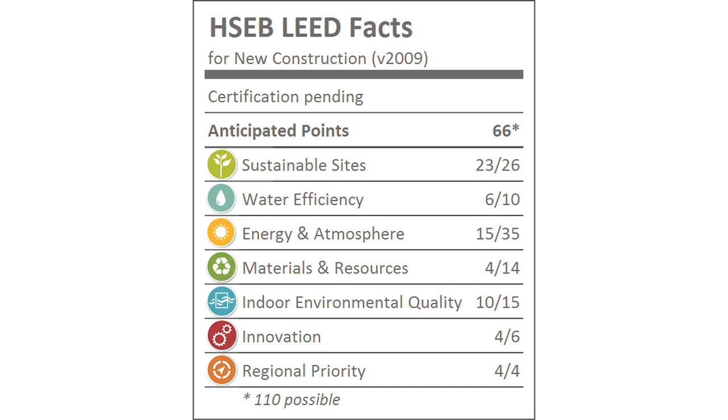The USGBC has identified promoting density and community connectivity, reducing heat island effect, reducing parking capacity, and water conservation as some of the most important environmental strategies for the Phoenix region. By achieving credits in the LEED for new construction rating system related to these strategies, the project will be able to receive up to 4 bonus points.

Most important LEED credit in Phoenix is the shade credit, especially for a site-specific person like a landscape architect. We had an integral role in deciding the tree spacing and also defining a tree green belt that would stretch from the entrance of the HSEB building all the way to whatever happens in the future at the north end of the campus. That, along with the architectural shade canopies and high reflective materials, making sure that we had a nice shade-rich environment, especially in the summer in Phoenix, was very important to us and something that we took an integral role in.

We utilized stabilized decomposed granite on this site as a major pedestrian thoroughfare. It's a material that we can use here in Phoenix because we don't have snow concerns, and we don't have as many puddling concerns. It's a permeable surface, and it's got a high SRI, and we were able to take advantage of the stabilized DG to contribute towards our shade credit.

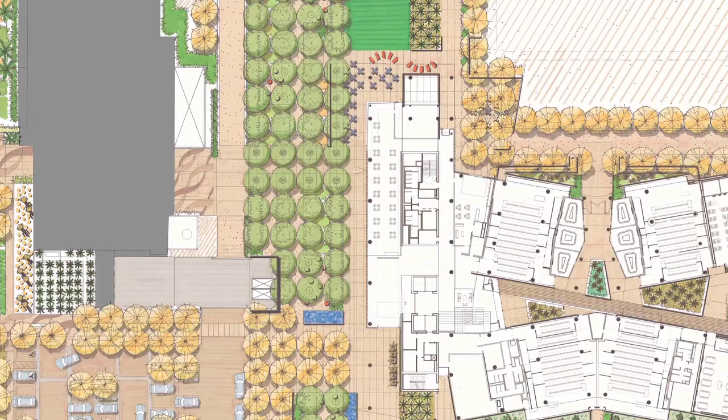So we have a very compact site, and one of the things that we've done is make sure that any runoff is going into a landscape area or into a permeable paver area. We're dealing with a lot of the water runoff on site. Phoenix has a requirement that the first flush is contained on site, and we've adhered to that.

I think it's an important aspect to not have your runoff be someone else's problem. So we've taken an approach to contain all of the water runoff on site using our retention basins, using landscape areas, and using permeable paver areas underneath vehicular driving aisles.

Some of the biggest LEED credit challenges on the project were ensuring that we could capitalize on a water use reduction. Even though we have turf on the project, we're using a very small amount of turf over the vivarium structure. We're taking an area that isn't necessarily good for other uses and using it for turf.

Turf uses a lot of water percentage-wise, but by keeping that amount of turf panel lower and using a lot of other native plant materials, we were able to reduce the water by over 50% as per the LEED requirement.

Some of the native species in Phoenix are extremely beautiful, so we've used Palo Verde trees on this project. We've used mesquite trees on this project, which were existing. Some other plants that we've used were Hesperaloe funifera, Hesperaloe parviflora, and we've used deer grass on the project. We've used these plants in masses so that as you're walking through, you'll experience different plants at different levels, and they'll repeat so that you're tied to the site a little bit more.

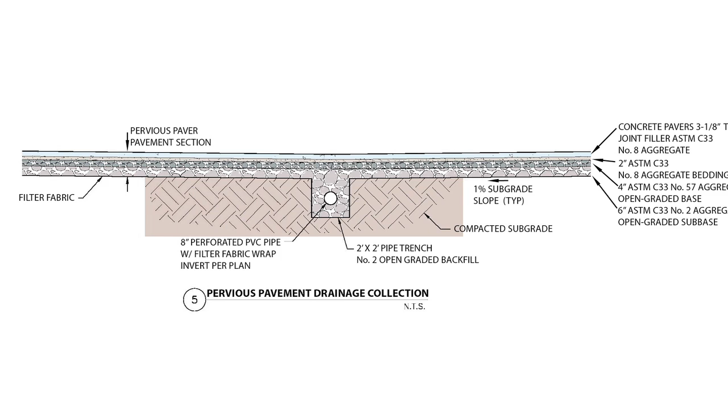On this project, we found that as we tried to reduce the heat island effect outside of the building, that went hand in hand with providing permeable pavement for parking at the site. LEED is valuable in a project such as this, as it brings to the forefront of our minds the need for sustainable design, and we can explore options such as permeable paving in lieu of asphalt, which reduces heat island.

The water savings in the building is accomplished through a number of low-flow fixtures, waterless urinals. The envelope is where you make up a lot of ground on your energy savings.

Waterless urinals are huge in water savings. They are by far the lion's share of water savings.

Sustainability as a global concept was a really important piece of what we do as a campus, recognizing that the world has some major challenges in the environment, in the economies of the world, and how we make a living, how we sustain ourselves as a species. We really began to recognize that students of this era need to be grounded and understand what's going on, be in a position when they leave the university and go into their corporate careers, government careers, businesses, that they're the ones who will provide the solutions and be able to do that hard thinking needed in order for us to reach the goal of a much more sustainable world.

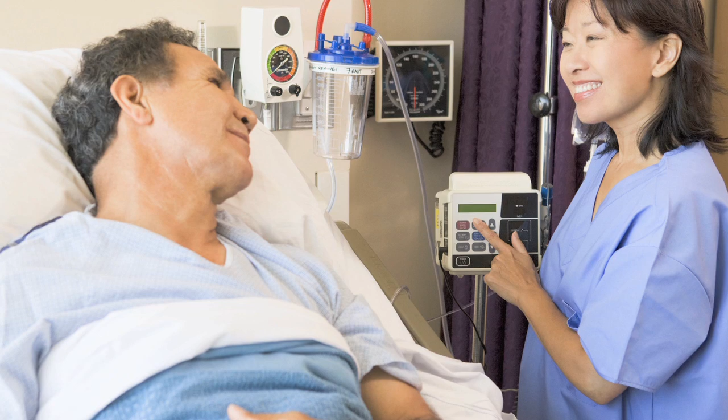One of the things we need to remember is this building is about healers — people who will go out as doctors and allied health professionals on the front lines of healthcare, providing medical services and serving as the next generation of doctors and healthcare professionals. They're being taught in a building that is very sustainable and green.

We're hoping that the fact they've experienced that will build into their psyche. When they're out working in hospitals, as administrators making decisions, in clinics and offices, they'll begin to incorporate these values into their thinking and their facilities, putting sustainability into their practices as well. We'll just continue this great dialogue and process.

The design team has developed comprehensive strategies for sustainable site development, water savings, energy efficiency, material selection, and indoor environmental quality. Now the team shifts gears and proceeds to the construction phase for the Health Sciences Education Building. Join us for Part 2 and the exciting conclusion of this case study. Part 2 will focus on commissioning, measurement and verification, construction challenges, daylighting, and feature an extensive tour of the finished facility. We thank you for watching and wish you good luck on your next LEED project.